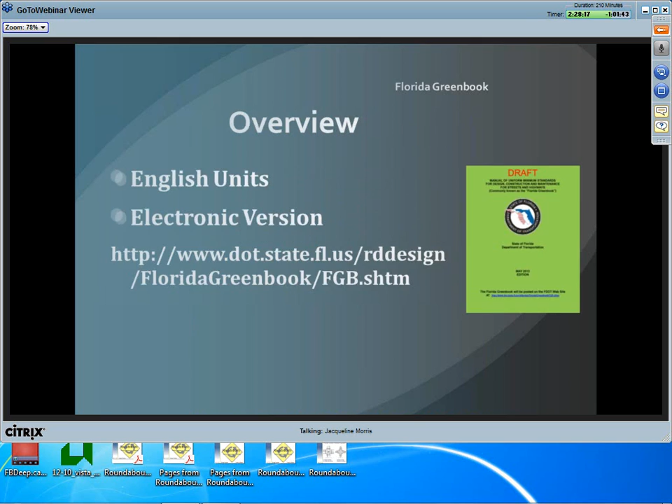Florida Statutes 336.045, Uniform Minimum Standards for Design, Construction, and Maintenance; Advisory Committee, is the basis for the Greenbook and its advisory committee. The Florida Greenbook is for local roads off the state highway system and federal aid system. The standards established by this manual are intended for use on all new construction projects.

The advisory committee consists of 28 members, 4 from each district. They are professional engineers. One representative is from an urban center, one from a rural area, one member not employed by any government agency, and one member employed by the department for each district. The committee typically meets in March to discuss proposed changes and decide if changes to the language are necessary.

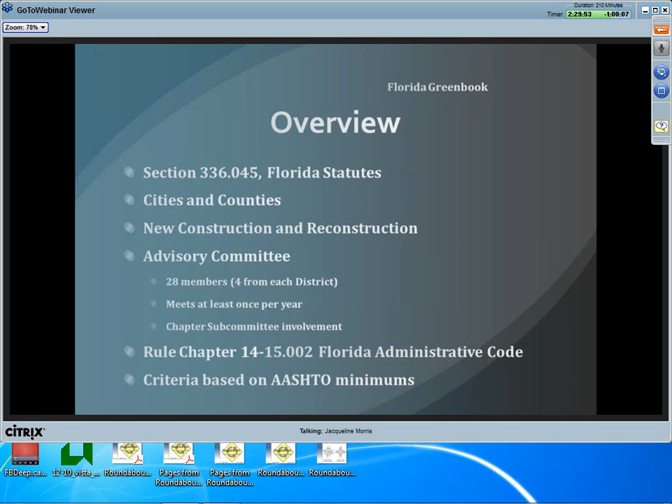There are also chapter subcommittees for each chapter of the Florida Greenbook, comprised of committee members and associate members. The Florida Greenbook is a rule. It must go through the rulemaking process for each new edition, and this typically takes about 3 to 6 months. The Florida Greenbook criteria is based on AASHTO minimums. If you have any questions, I'd like to hear from you throughout the year.

The 2013 draft Florida Greenbook is posted on the Florida Greenbook website about midway down the page under Proposed Florida Greenbook. It is currently in rulemaking and should be our new manual around May of this year. We will cover 3 major changes to the 2013 Florida Greenbook: roundabouts, bridge width, and safety edge.

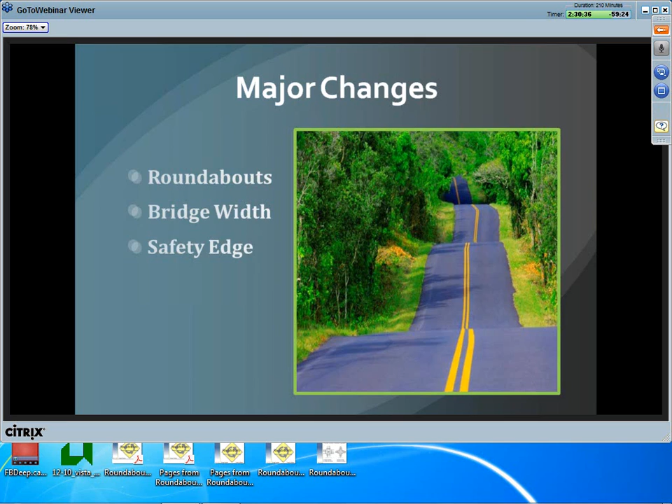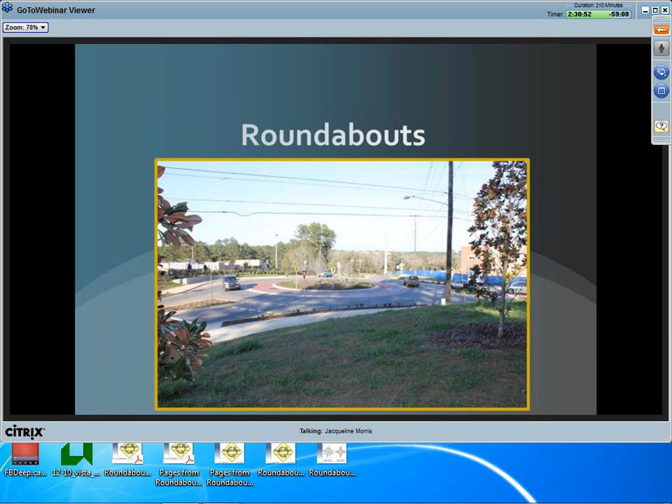We are starting to see more roundabouts on local roads. This is a picture of one here in Tallahassee near Tom Brown Park, where Easterwood Drive and Weems Road intersect. NCHRP Report 672, Roundabouts: An Informational Guide, is adopted by FHWA and establishes criteria and procedures for the justification, operational, and safety analysis of modern roundabouts in the U.S. Roundabouts should be considered under the following conditions: new construction, reconstruction, traffic operations improvements, resurfacing, and to reduce crash frequency and severity.

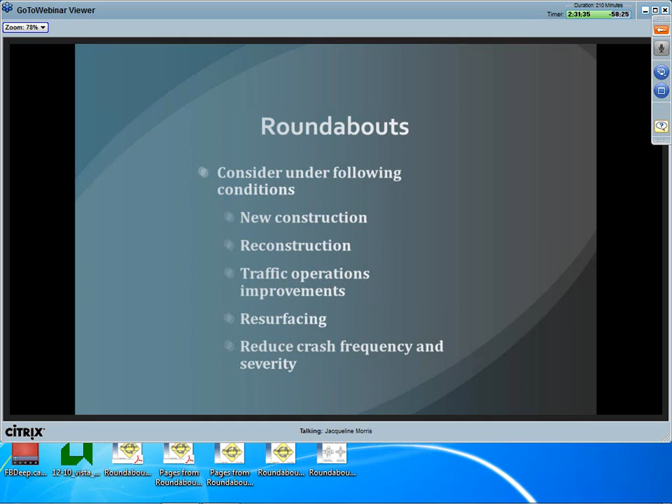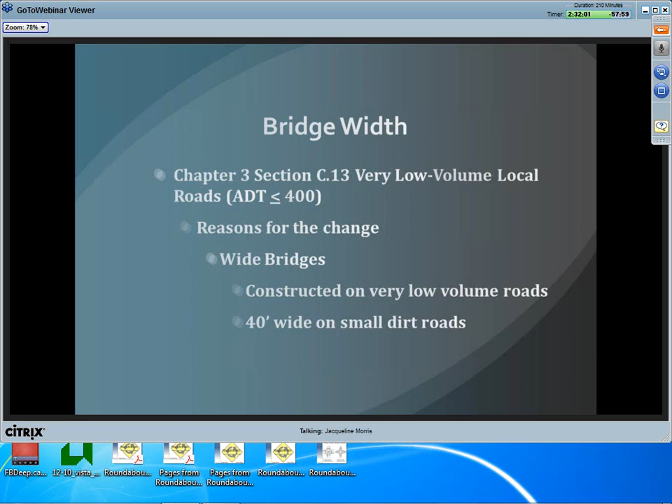Our next topic is bridge width. Standard 2-lane bridges with shoulders have been constructed on very low-volume local roads. Bridges as wide as 40 feet have sometimes been found on small dirt roads with only 1 lane and very little traffic. Section C13, our new section, Very Low Volume Local Roads, was added in Chapter 3. Where criteria is not specifically provided in this section, the design guidelines presented in Chapter 4 of the AASHTO Guidelines for Geometric Design of Very Low-Volume Local Roads may be used in lieu of the policies in Chapter 5 of the AASHTO Greenbook.

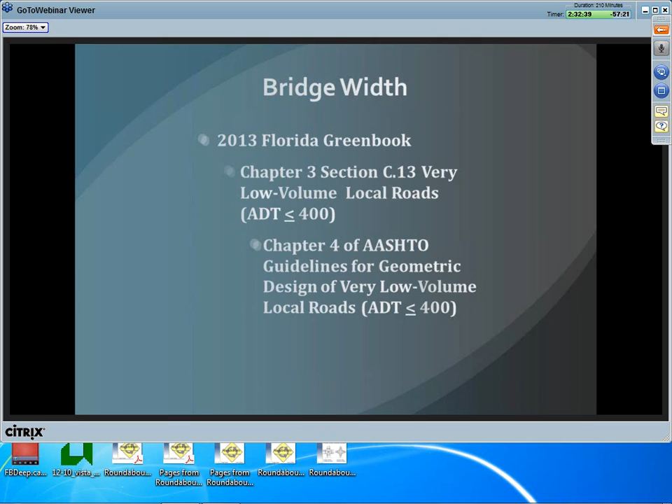Section C13 provides some minimum criteria for guidance for these bridges. The minimum roadway width for new 2-lane bridges on low-volume roads with 20-year ADT between 100 and 400 vehicles per day shall be 22 feet. If the entire roadway width is paved wider than 22 feet, the bridge should be equal to that total roadway width. 1-lane bridges may be provided on single-lane roads and on 2-lane roads with ADT less than 100 vehicles per day, where a 1-lane bridge can be operated effectively. The roadway width of a 1-lane bridge shall be 15 feet.

Section C13B provides criteria for bridge traffic barriers. Bridge traffic barriers on low-volume roads must have been successfully crash tested to Test Level 2 in accordance with NCHRP Report 350 or MASH.

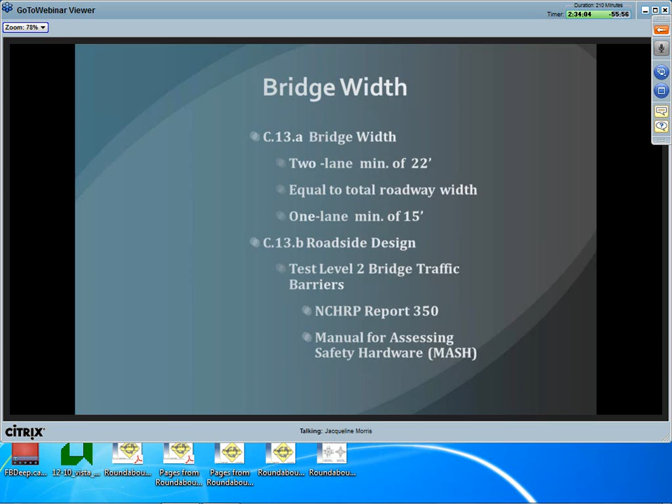Our final topic is Safety Edge. The Safety Edge has been added to Chapter 5, the Pavement Design and Construction chapter of the Florida Greenbook. Section A of the introduction has been changed. Safety Edge shall be considered in the design and construction of the pavement adjacent to the travel lane on roadways without curb and gutter or paved shoulders, and with posted speeds of 45 miles per hour or greater. This is for new construction.

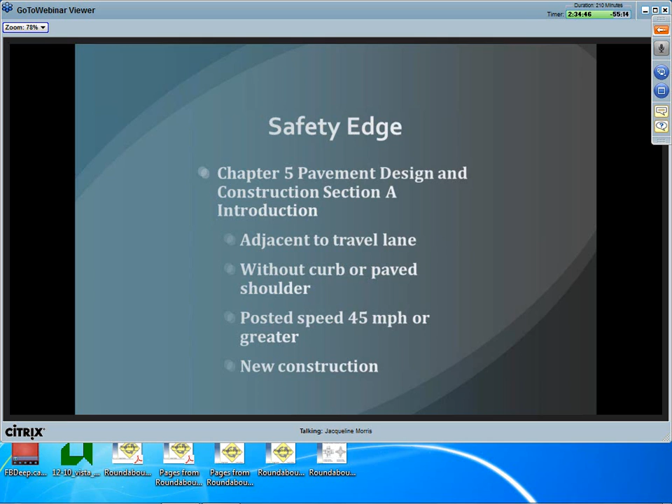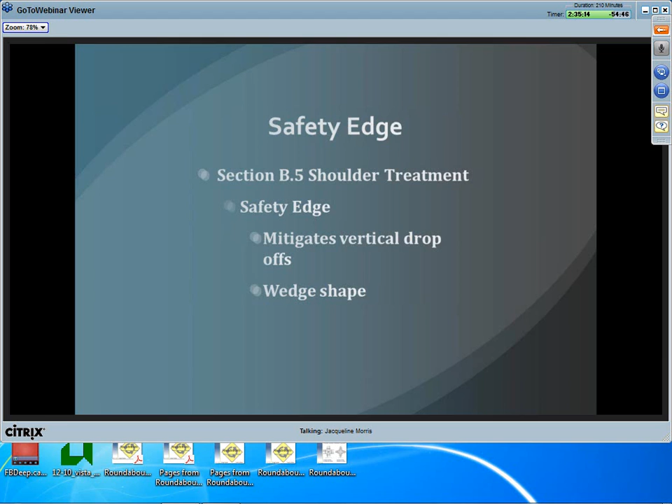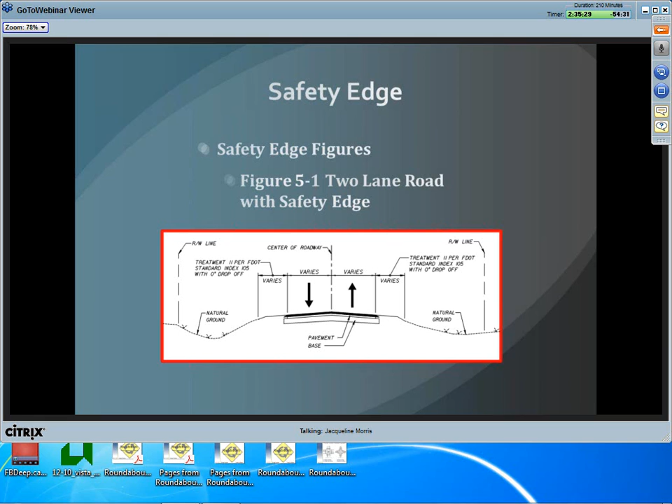Section B5, Shoulder Treatments, has been modified for Safety Edge. This section provides information on Safety Edge. Safety Edge is technology that mitigates vertical drop-offs. The wedge shape eliminates tire scrubbing and improves vehicle stability as it crosses a drop-off. There are 2 details for Safety Edge that have been added to this section: Figure 5-1, shown here, for 2-lane roads, and Figure 5-2, Safety Edge detail. Notice the Safety Edge angle of 30 degrees and the minimum total height of 2 inches. The maximum height shown there is 5 inches.

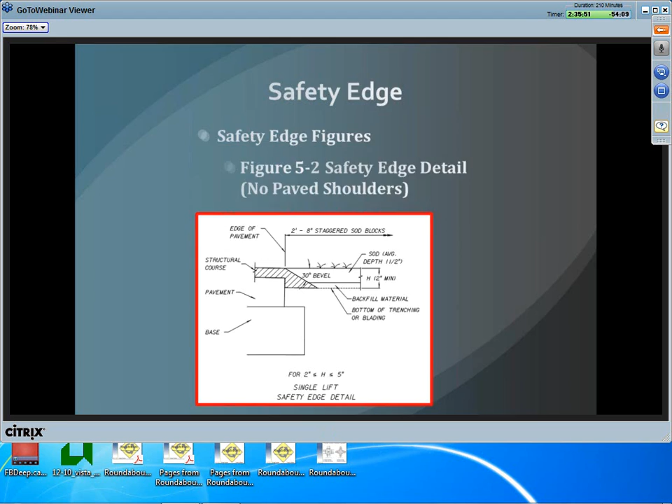In summary, NCHRP Report 672, Roundabouts: An Informational Guide, establishes criteria and procedures for the justification, operational, and safety analysis of modern roundabouts. Roundabouts should be considered under the listed conditions in Section C8D6. As far as bridge widths, guidelines presented in Chapter 4 of the AASHTO Guidelines for Geometric Design of Very Low-Volume Local Roads may be used in lieu of the policies in Chapter 5 of the AASHTO Greenbook.

For bridge widths, we now have minimum criteria and guidance, and for bridge traffic barriers on local roads, we have criteria for that now. As far as Chapter 5, we have the new language for Safety Edge with the 2 figures and guidance on when to use it.